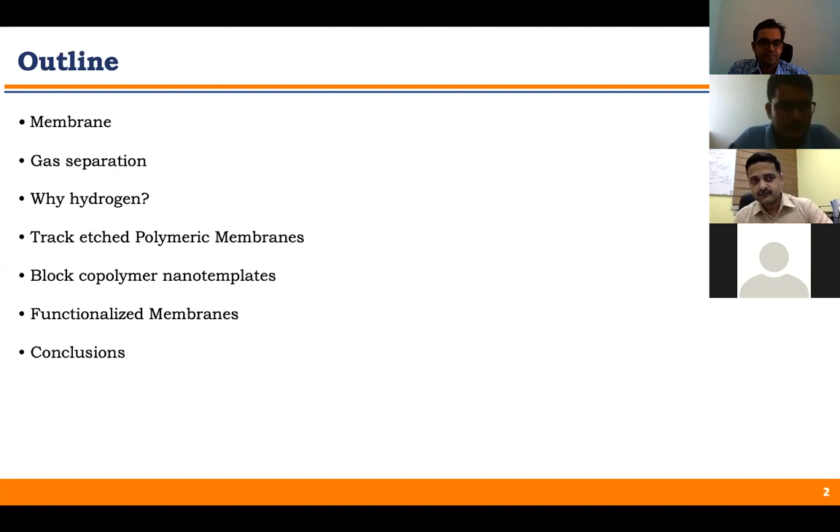Okay. So a membrane, we can say, is a selective barrier between two phases that may allow the movement of different species under the presence of a driving force over the membrane. It may be liquid, it may be gas, or something else. And how can we force one part from one side to another? These driving forces may be a concentration gradient, pressure gradient, temperature, or electrical potential gradient over the membrane.

So basically that will control the movement of one species into another. That may speed up the process or slow the process. These are typically the driving forces used in membrane separation. Biological membranes, or cell membranes, also regulate what enters and leaves the cell, and they provide protection and support; they are generally known as the plasma membrane.

And just remember, these cell membranes are very selective. They can allow only one type and stop the others. So can we mimic the same properties in a synthetic membrane, so that we can prepare a selective membrane for our application, like water purification or gas purification? This is the one major motive for those working in membrane science: to prepare highly permeable and highly selective membranes.

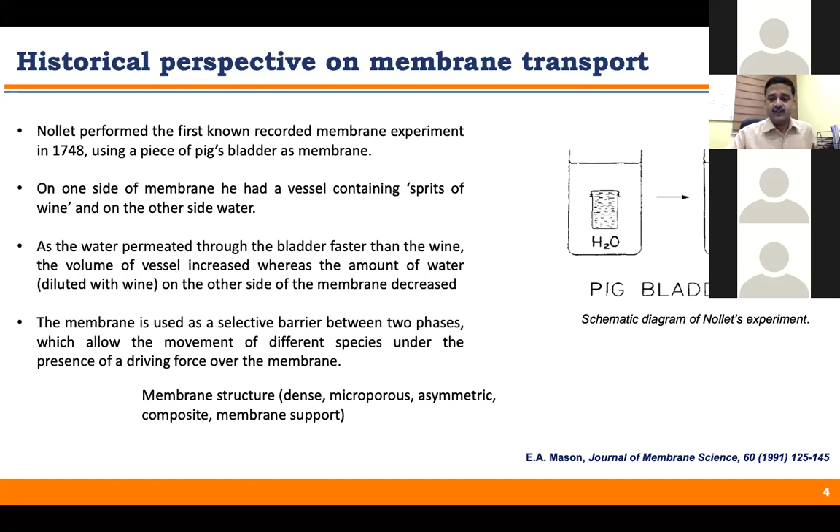So these are the types of membrane. Based on the structure, we can call them dense, microporous, asymmetric, composite, or membrane support. And membranes are basically of two types based on their structure: isotropic membrane and anisotropic membrane.

Isotropic membranes are categorized into three further categories: microporous, with pores having 0.01 to 10 micrometer diameter; dense non-porous, meaning there is no porosity or holes, where the driving force is basically diffusion or solubility; and electrically charged microporous membrane. I will show you some examples of this dense non-porous membrane too. So these are the examples of isotropic membranes.

Another category is anisotropic, that is asymmetric. Here we have a thin active layer supported on a thicker porous layer. That may be composite, and another part may be ceramic, metal, or liquid membranes. Nowadays people are using this anisotropic membrane for various applications like gas separation and other ion separation. I will show you a few examples of anisotropic membrane too.

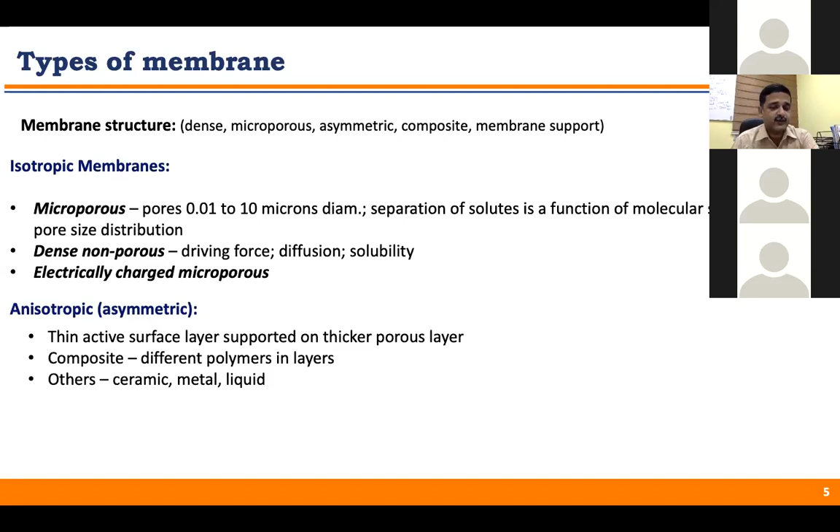So what are the membrane materials and the fabrication methods? You can make this membrane from polymers, metal membranes, ceramic membranes, or liquid membranes. But my lecture today will be more focused on polymers. I've already discussed the two types of membrane, isotropic and anisotropic.

This isotropic membrane can be made by solution casting and melt extrusion, track-etched membrane, expanded film membrane; and anisotropic membrane made by phase separation, interfacial polymerization, solution coated composite membranes, and plasma deposition. I will discuss each of these methods in detail in my next slides.

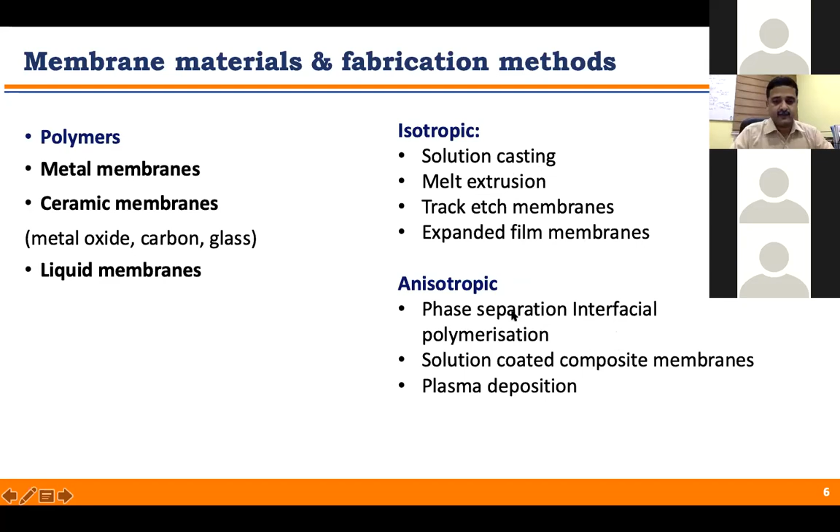And these are the various membrane processes: microfiltration, ultrafiltration, reverse osmosis (RO membrane) that you're using for water purification, gas separation, permeation, pervaporation, dialysis, electrodialysis, and liquid membrane.

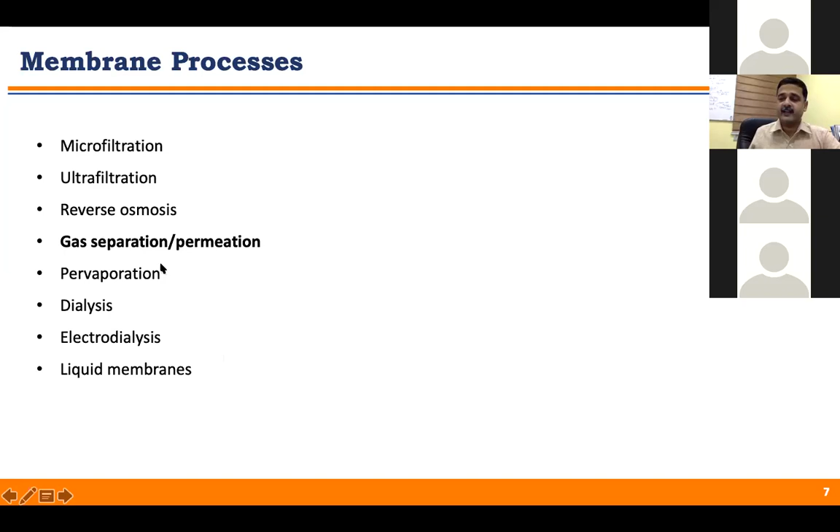I will show you some examples related to gas separation and permeation, based on work that I have carried out over the past couple of years.

How can we differentiate the different kinds of membrane technology? We have microfiltration, ultrafiltration, nanofiltration, and RO. These are basically categorized on the basis of porosity or pore size. I will use two terms in my presentation: porosity or pore size, meaning the size of pores in the membrane, and pore density, meaning the number of pores in the polymeric membrane per unit area. If you see microfiltration, the pore size is too large.

That's why we need less operating pressure for microfiltration, around 30 psi. Using this microfiltration membrane, we can remove clay, bacteria, virus, and suspended solids.

But if something is smaller, we have to use the ultrafiltration membrane. Here the pore size is 0.01 to 0.001 micrometer. As we decrease the porosity, the operating pressure increases—here it's 20 to 100 psi. This kind of membrane can remove virus, proteins, starch, colloids, silica, and organic dye, because the size of these materials is either greater than or roughly equivalent to the porosity of the membrane.

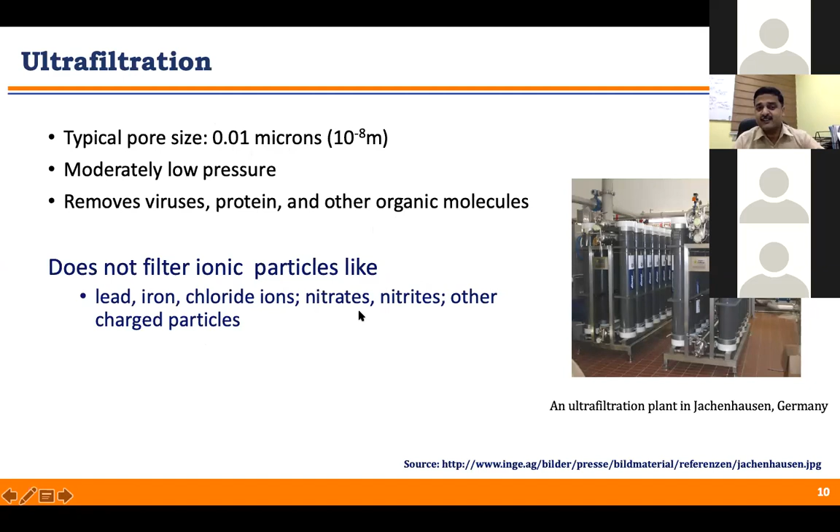Then there is another possibility, we can use nanofiltration. Here the membrane porosity is 0.001 micron, and it can be used at moderate pressure. It removes toxic, unwanted bivalent ions with 2 or more charges, like lead, iron, nickel, and mercury, but not monovalent ions. So we need this RO membrane.

As I told, this RO is operated at very high pressure, and it's the only economically feasible large-scale method to remove salt from water. So large plants are used for reverse osmosis or desalination water treatment near the ocean.

But this RO is not for everything, because it is the most costly filtration system. Since the pores are so small, big particles can clog them, and this is the problem called fouling, which makes the filtration membrane unusable.

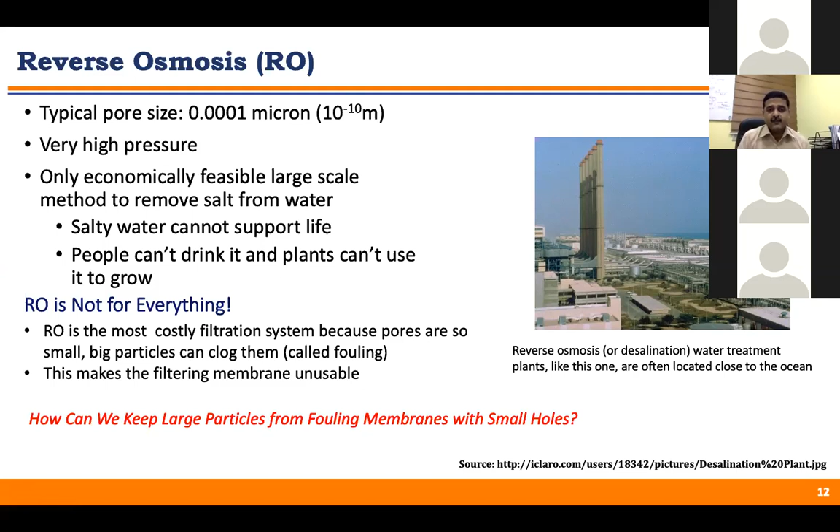So can we do something with a polymer or some other kind of membrane to reduce the process of fouling, so that the membrane cost can be reduced and its life increased?

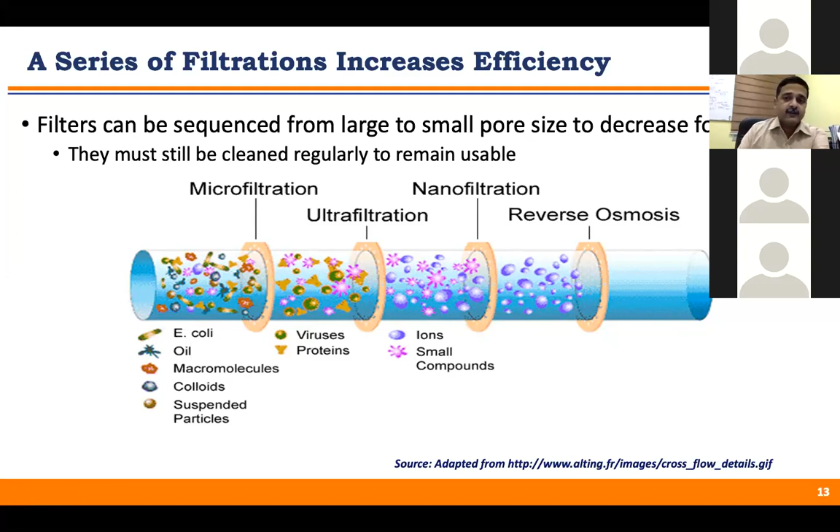Okay, so this is the first example. If we use a series of filtration, like microfilter, ultrafilter, nanofilter, then RO, that can be used to increase the life of the RO membrane, because we have step filtration at every stage. But again, the cost of the membrane and the process increases. So this is not a good solution for membrane technology.

So there are a couple of papers reported for nanofiltration. What people have done is prepare nanoparticles with special properties. Special size means these nanoparticles can attract one kind of impurity, and that impurity gets attached within the pore or on the nanoparticles, so it will not pass through during filtration.

So people are using metal composite or nanoparticle based membranes for various applications. This nanomembrane can be designed in layers with particular chemistry for a specific purpose. They insert particles that are toxic to bacteria.

They embed tubes that pull water through and keep everything else out, signaling the membrane to self-clean. The 1 to 2 nanometer size pores create an electric field over the opening. This electric field is negative and repels negatively charged particles dissolved in the water.

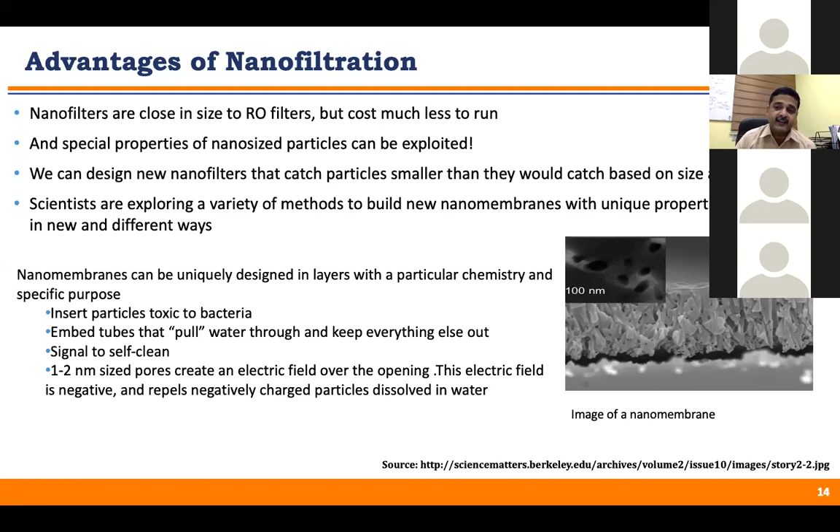Now the question comes: everybody knows this is a polymer, a long chain molecule. So in a normal synthetic membrane or polymer, how is it possible to have an electric field in the pores, and how can we control it? We will discuss this during the pore size and porosity discussion.

So this is just an overview of membrane technology, the types of membranes and the problems. This is the application part I'm working on, using gas separation with these kinds of membranes, particularly hydrogen separation. Just for your reference, the hydrogen gas molecule is the smallest.

The other gases, like nitrogen, carbon dioxide, and oxygen, are not very big compared to hydrogen. So the gas separation part is relatively different from what we think about in liquid membranes or in water. I will show you a couple of slides with these separation results.

So why hydrogen separation? Because it is used in plants and petrochemical applications. We are separating nitrogen from air, carbon dioxide and water removal from natural gases, organic vapor removal from air and nitrogen streams. And the most important application is the fuel cell.

At the moment, the most widely used membrane materials for gas separation are polymers. People prefer these polymers over other kinds of materials because they have low capital investment, low weight, high process flexibility, and high surface area.

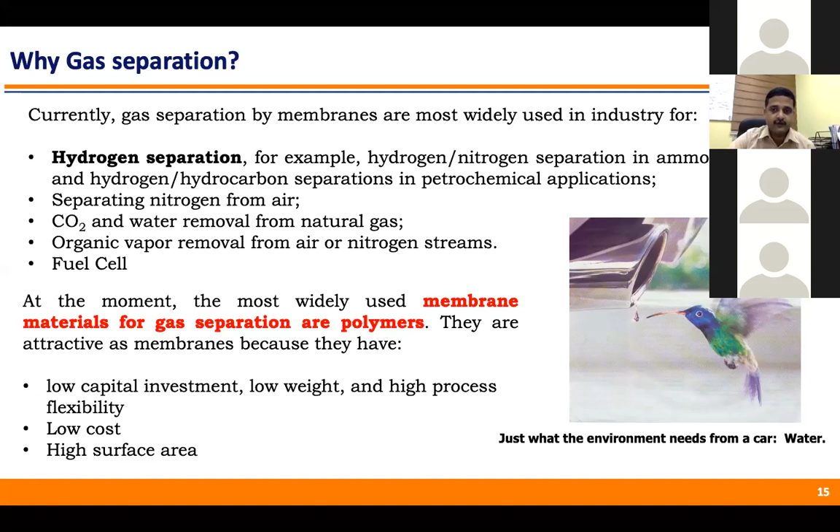So can we produce pure hydrogen for this application to make it feasible to use such technology for all? I'm interested in hydrogen because of the fuel cell part—this hydrogen powered car and the hydrogen powered train being used in Germany.

So the fuel cell conclusion means no pollution caused by burning fossil fuels. Water is the only byproduct, and that decreases dependence on foreign countries for energy. They have stationary fuel cells for decentralized power grids, more efficient than diesel and gas engines, quieter than diesel and gas engines, and with lower operating temperature, and so on.

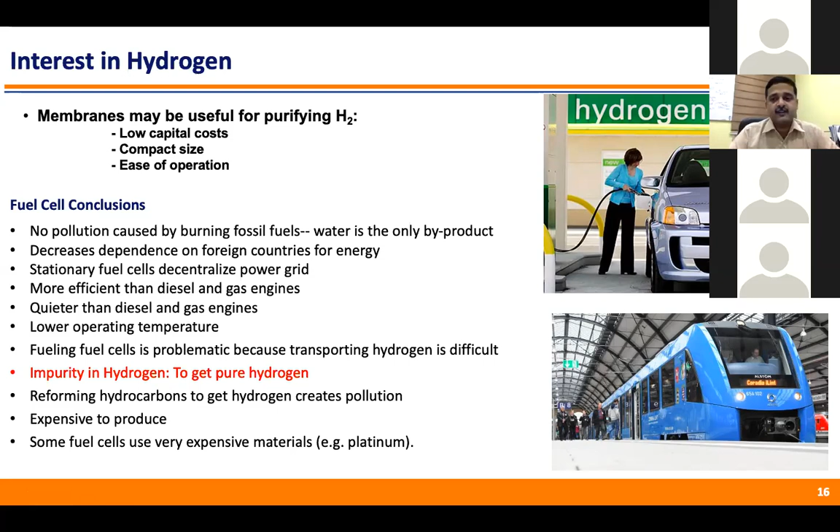But in fuel cell, the impurity in hydrogen is again a challenge. So can we purify the hydrogen before its application? Can we put some kind of membrane so that it allows only pure hydrogen and blocks other kinds of gases? This way, the fuel cell cost can be reduced. So this is the motive.

And this is the mechanism for transport through the membranes: bulk flow, diffusion, solution diffusion, and dense membrane.

An ideal membrane should have high flux, high permeability, high selectivity, tolerance to all feed components, mechanical stability, ability to package in high surface area modules, excellent manufacturing reproducibility, and low cost.

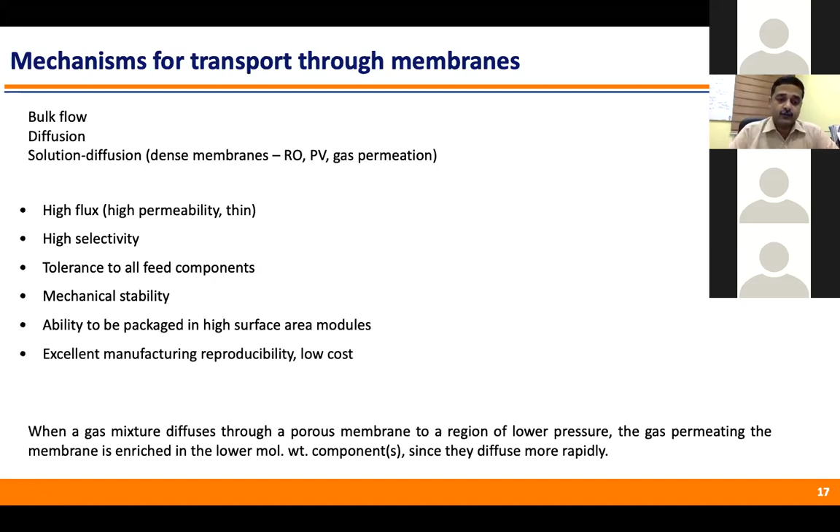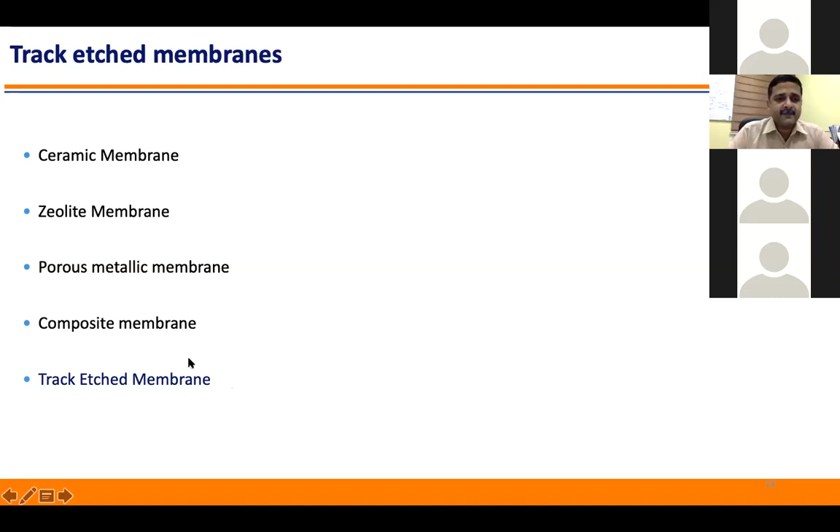These are the various types of membranes: ceramic membranes, zeolite membranes, porous metallic membranes, composite membranes, and track-etched membranes. So I am going to show you a couple of examples of this membrane.

So this is the mechanism that I have discussed, these three: bulk flow, diffusion, and solution diffusion. Here you can see two gas molecules, one small and the other larger.

If you talk about solution diffusion, due to the solubility difference, only one kind of gas molecule gets separated from this membrane. When we talk about molecular sieving, that is based on size exclusion. Please remember, I'm talking about solution diffusion - this model is true for the dense membrane, where the pores are very small in comparison to the gas molecule.

These two models are true for this porous membrane. When we talk about porosity, it means the pore structure is too small so that only one gas can pass through and others are blocked. This is based on size exclusion. Another is based on the mean free path, meaning the pore size is too large, so every gas can pass through comfortably. This is the upper side, the gas feed side, and this is the permeate side.

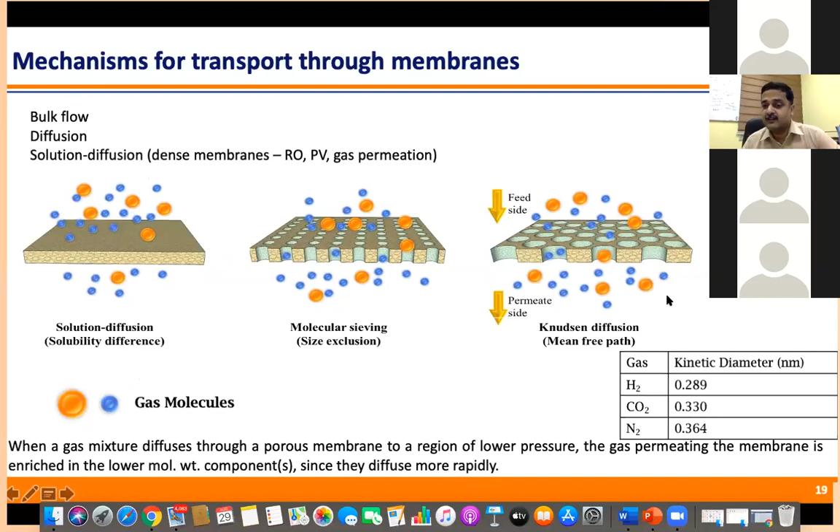So we can make some membranes - I think I discussed the slide on the ideal membrane. Here you see the complete picture of this membrane technology.

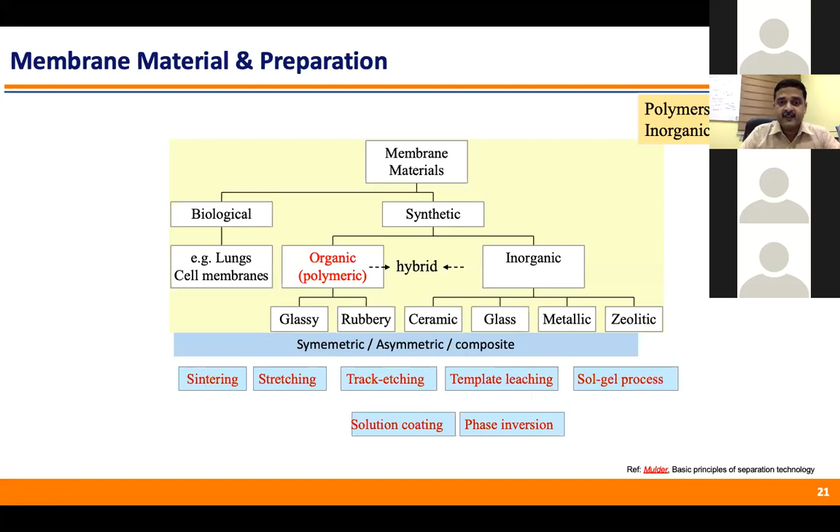Symmetric, asymmetric, composite - already I have discussed these. These are the processes by which membranes are made: sintering, stretching, track etching, template leaching, sol-gel process, solution coating, and phase inversion. In the next 5 or 10 minutes, I will show you some of these process details. Solution coating and phase inversion are the popular techniques used for membrane separation.

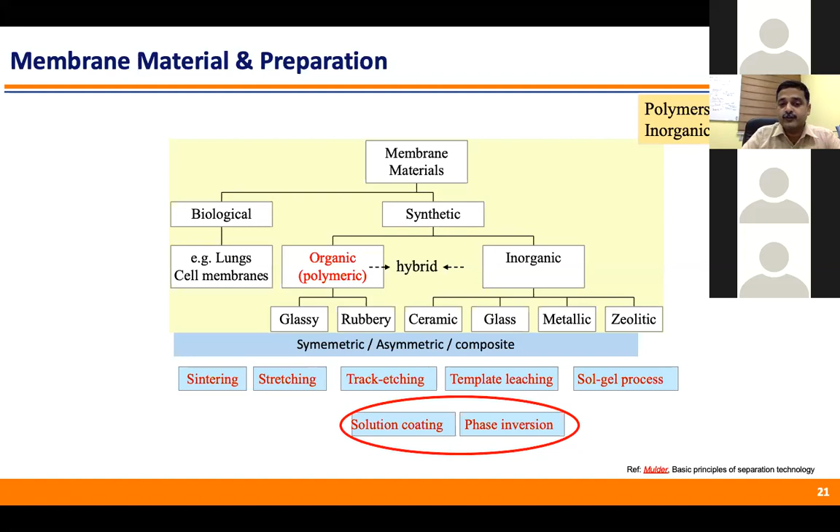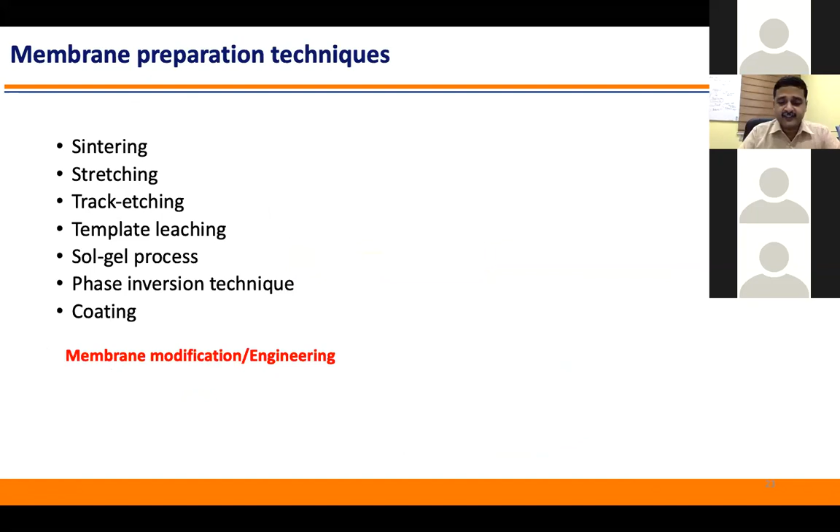Apart from these preparation techniques, we can also do some membrane modification or engineering on these earlier membranes to make them more versatile or more useful for application-based purposes.

What is the sintering process? Sintering process involves compressing a powder consisting of particles of a given size and sintering at high temperature. This produces a polymeric and inorganic membrane with outstanding chemical, thermal, and mechanical stability. Sintering temperature depends on the material - polymers, metals, ceramic, carbon, and glasses. Pore size and distribution depends on the particle size and distribution, generally 0.1 to 10 micrometers. This is the structure, and after heat treatment, you can see the interconnected porosity that has been generated.

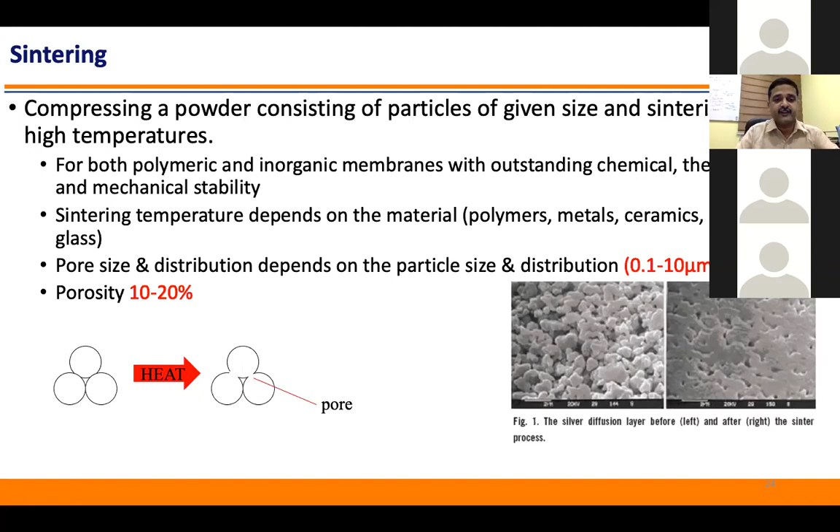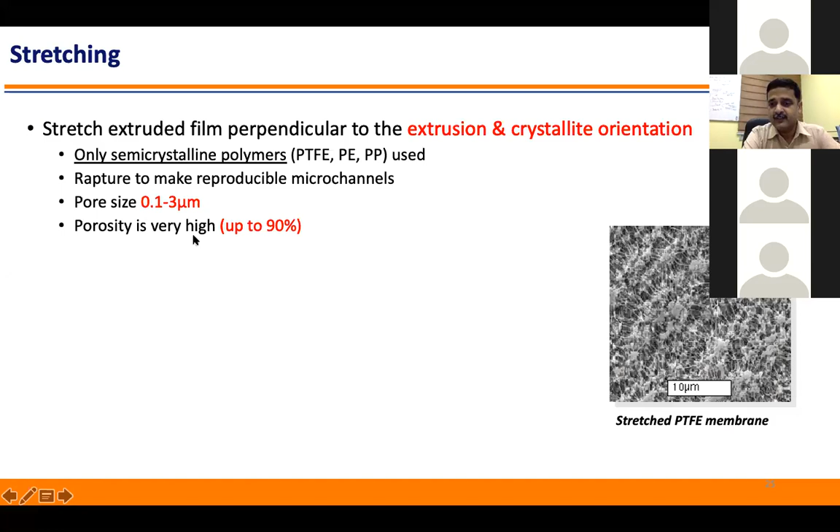Another example is stretching - this is an extruded film perpendicular to the extrusion and crystallite orientation. But this process is only for semi-crystalline polymers like PTFE, PE, and PP. Rupture creates reproducible microchannels, and here the pore size is 0.1 to 3 micrometers, and the porosity is very high. Please remember, porosity means the number of pores per unit area. And this is the phase inversion technique.

Generally, we use phase inversion for making composite films or block copolymer nanotemplates. So what is happening here? A polymer is transformed in a controlled manner from a liquid to a solid state.

Phase inversion covers different techniques. For example, we start with a concentrated solution of a polymer in a solvent, and through addition of a non-solvent, sometimes from the vapor phase, we can prepare asymmetric membranes.

Basically, we get a dense skin layer integrally bonded in series with a thick porous substructure, made of the same material in each layer, and this solidification is initiated by a transition from one liquid state into two liquid phases, or liquid-liquid demixing, and so on.

So in a broad sense, we generally get this polymer in solid form or in grains, which means we have to dissolve these polymers in a solvent.

And again, you can pour this structure, or you can use this liquid state to get your required thickness or required shape.

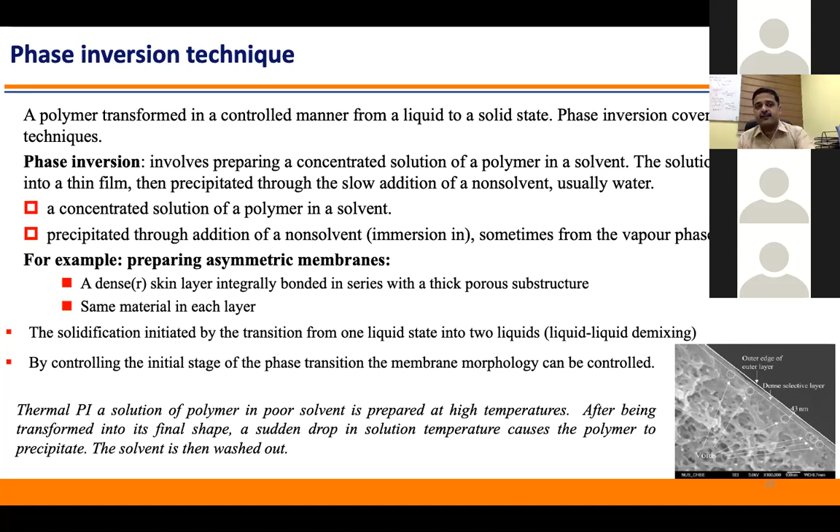So when you are transforming this liquid to a solid state, this process is generally known as phase inversion.

These are the various steps in phase inversion techniques. First, precipitation by solvent evaporation, also called simple evaporation or coating. Another is precipitation from the vapor phase.

This vapor phase may be a non-solvent and a saturated solvent, used to prepare porous membranes without a top layer. Another part is precipitation by controlled evaporation.

In this case, the polymer is dissolved in a mixture of solvent and non-solvent, to form the skin layer. This is thermal precipitation, meaning the polymer solution is cooled to enable phase separation, and then we can prepare the membrane with the skin layer.

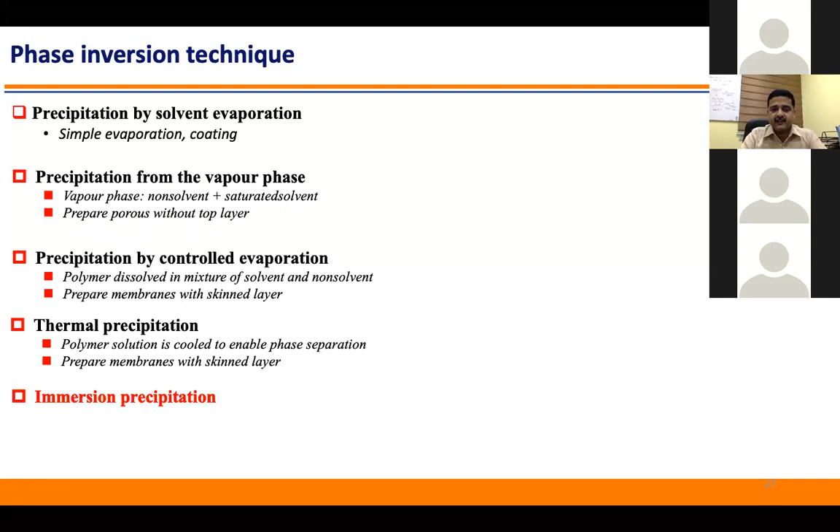Another method is immersion precipitation. Here you see a support on which you have coated your polymer solution. There are two possibilities: one is using a non-solvent, another is using a solvent.

So in this polymer solution, precipitation occurs because of the exchange of solvent and non-solvent, and this membrane structure results from a combination of mass transfer and phase inversion.

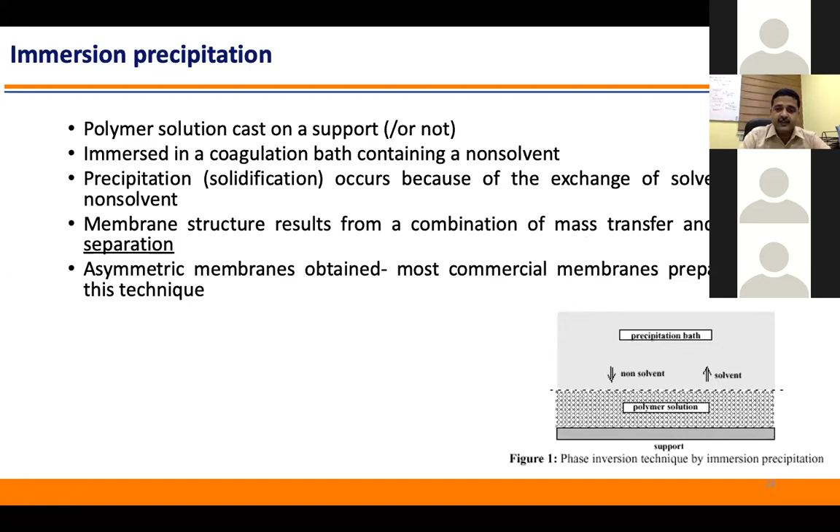With this process, we can make asymmetric membranes, and this is the most common commercial technique for preparing them — immersion precipitation is an active example of the phase inversion technique.

Now I'll cover another very simple method to make a thin film, or dense membrane, in your laboratory easily — this is the solution cast method.

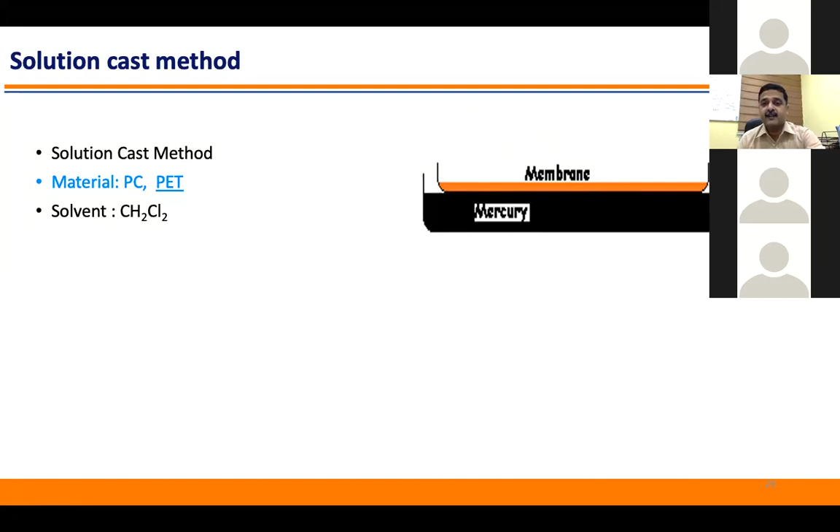It does not have any porosity, and in such a membrane, porosity can be introduced using other methods. The popular example is track-etched membranes.

This means we are creating tracks, or a path, in the membrane for the formation of pores. And why is this track-etched membrane so popular?

Because here you can control the pore shape — you can make them cylindrical, conical, or double conical.

You can also control the pore size, from a few nanometers to micrometers, and you can control the pore density, meaning the number of pores in a given area.

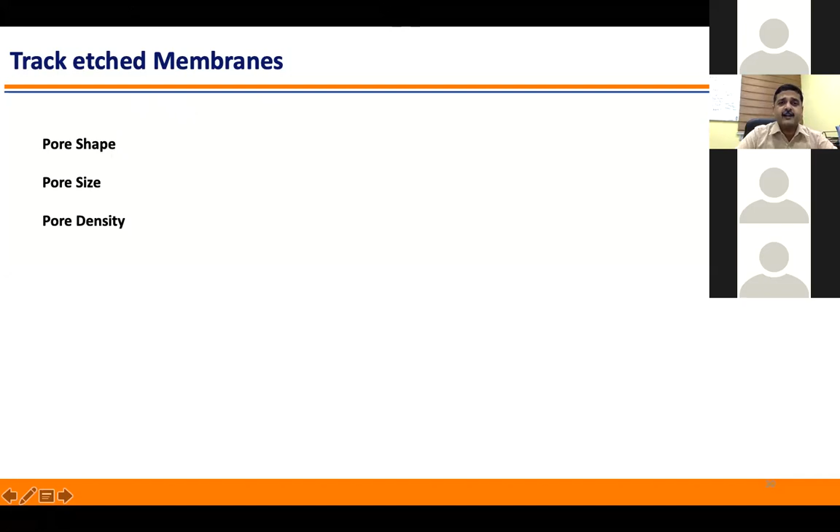So how can we do this, and what is the process to create these channels? We do this polymer modification using Swift Heavy Ions, SHI.

These facilities are available at the Nuclear Science Center, earlier known, and now called the Inter-University Accelerator Center, IUAC, New Delhi, and also at TIFR Mumbai.

They have this accelerator, and you can go there and use your polymer film for ion bombardment to create porosity.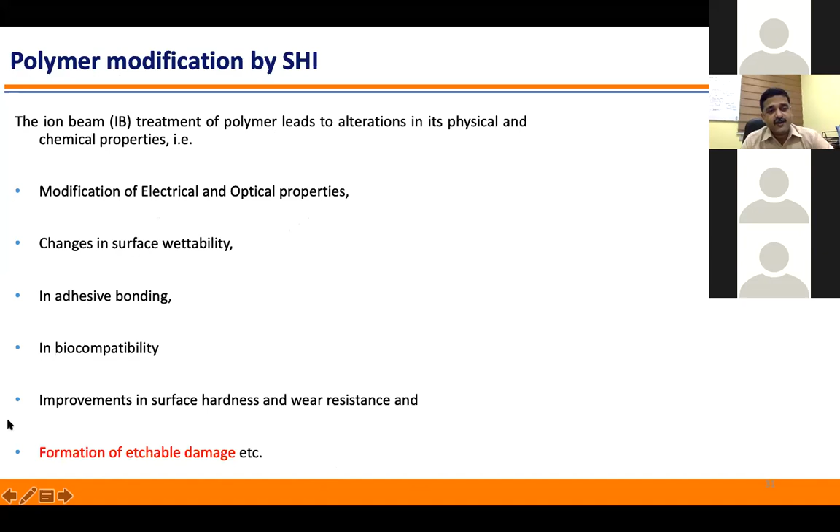So what ion beams can do is change a polymer's physical and chemical properties. They can modify electrical and optical properties, surface wettability, and so on. But the main important area is the formation of etchable damage. What is happening there? Okay.

You know, a polymer is a long chain molecule. So just imagine what happens if a high speed particle crosses this polymer film. These polymer chains basically break. And what is the process here? You can see this is a polymer chain, and this is the energetic particle crossing it. So chain scissioning is there, chains are breaking, and again cross-linking with the neighbor chains.

Ultimately, what is happening? The free volume inside the polymer is changing. And this is a simple picture that you can understand. This is the path of the ion, what we call the halo or track, created by this ion beam, and this is the damage being created by this ion beam. The ion beam is not going straight, it is creating a helical path, and these chains are bound loosely with the material, and they can be removed chemically. This process is known as chemical etching.

So the change in the polymer depends, of course, on the energy of the ions. What is the energy of the ion? Whether it is able to cross this membrane or not. What is the mass of the ion? What is the charge state? And what is the dose? Dose means number of ions per centimeter square. Okay.

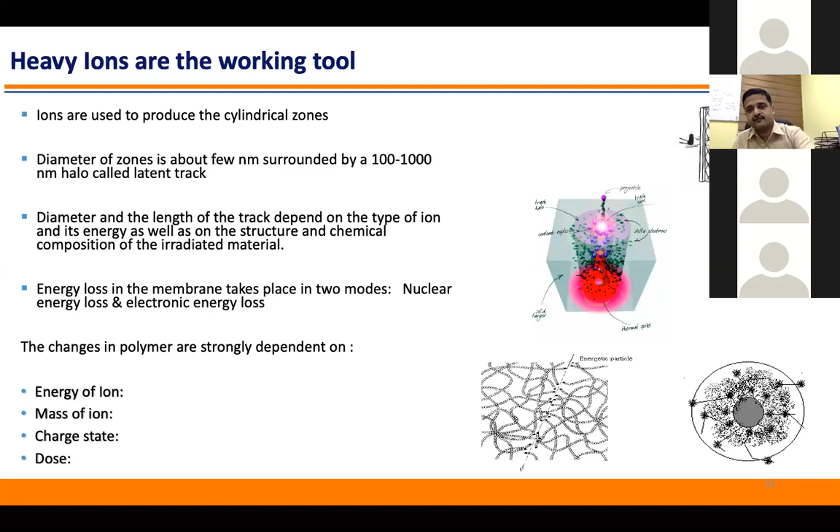So this is a typical attachment that is available in IUAC New Delhi. What is happening here? We are getting an ion beam, and this is a gold foil. Here the ion beam is scattered in this chamber. You can see the 3 ports on this side, 3 ports on this side, and this is the surface barrier detector. And here we have our samples, membranes, mounted at different angles: 6 degrees, 12 degrees, 18 degrees, again 6, 12, 18, and 24 degrees.

So by Rutherford scattering, we can control the fluence. We know exactly the number of ions coming at 24 degrees, so accordingly we can fix the dose at 18, 12, and 6. Generally we have 10 to the power 6 ions per centimeter square, 10 to the power 7, 10 to the power 8. So in a single beam line, we get 3 doses at 6, 12, and 18 degrees in a particular time, depending on the current.

But the only problem is this is a huge chamber. So maintaining the vacuum and other processes takes around 2 to 3 hours, and the irradiation process takes only a few minutes, maximum 3 to 4 minutes. Again, we take the samples out and mount another set of samples. So my sense is we are able to get only a few samples in 24 hours by using such an attachment.

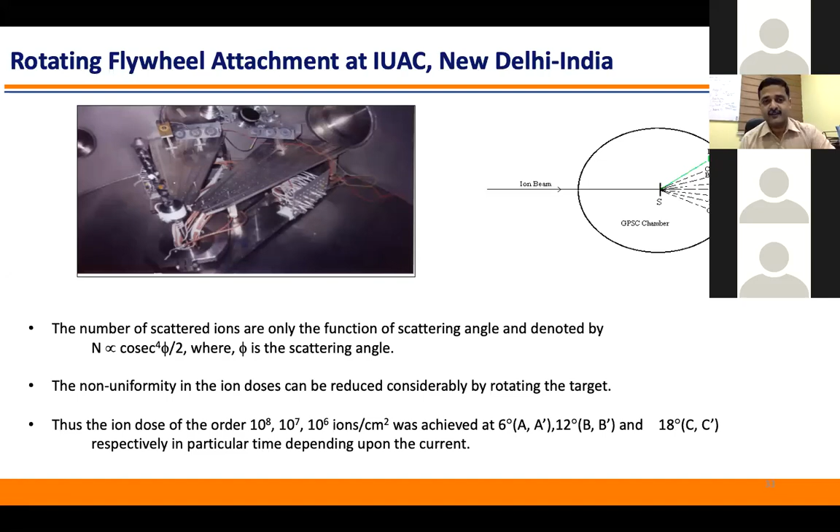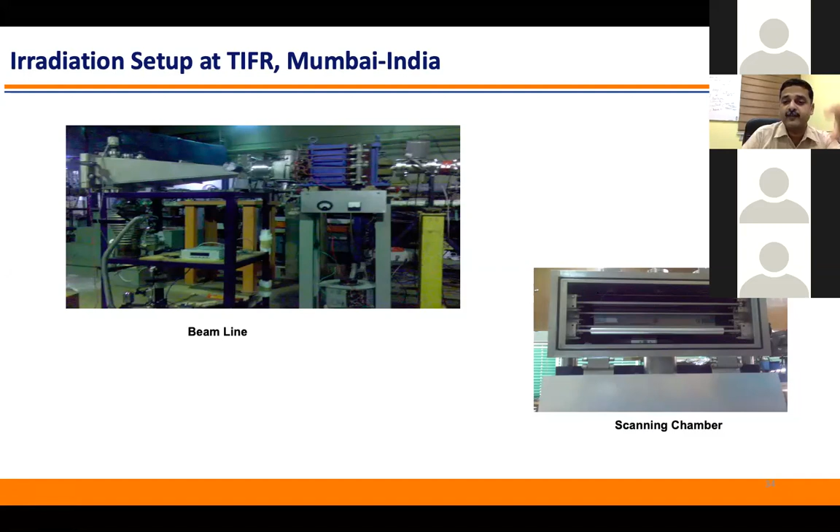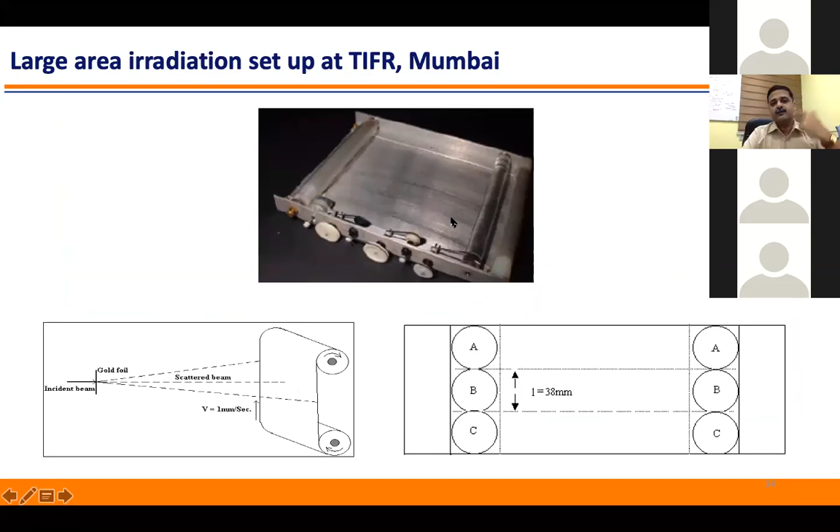Then there is another irradiation setup available in TIFR Mumbai. Here we have another facility. Not scattering; here the beam is scanning. This is the polymer roll mounted here. The beam scans over this film, and you get a single pore density or single dose membrane by using such a facility. Okay, this is how the film is rolled using this facility at TIFR Mumbai.

But what is happening finally? As I told in my previous slide, by ion beam bombardment you are creating tracks. This is the ion beam path, and there is damage around this track, which you can remove chemically, so you get the porous membrane. So latent tracks form as a result of ion irradiation. When you put it in a chemical etching bath of a strong base, NaOH, this path is removed chemically, so you get this porous structure.

But if you are etching from one side, you will get a cone-like structure. When you are etching from both sides, initially it may be cylindrical or conical.

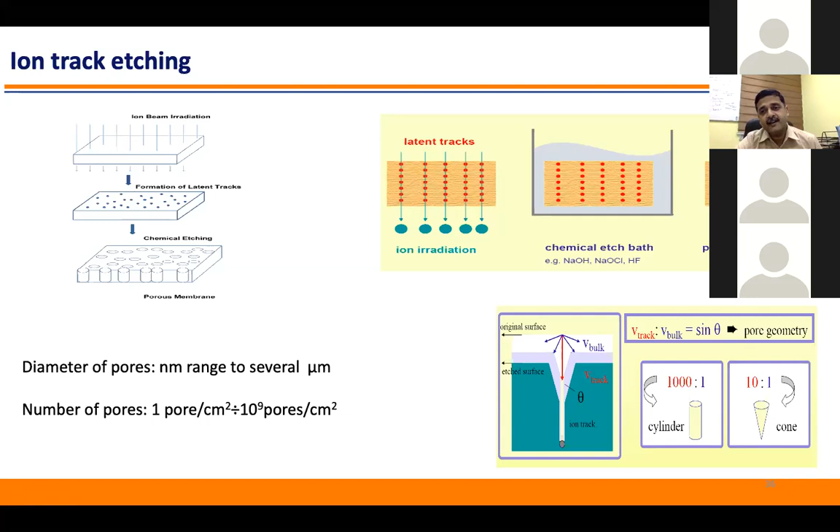Sorry, initially it may be conical, and later on it can be converted to cylindrical. How? So this is the track shape if you are using the increasing rate, constant rate, and decreasing rate. So suppose you are doing this etching from both sides; just imagine this is the condition from this side and the same condition from this side. So when these vertices are opening, it is a perfect combination of a double cone.

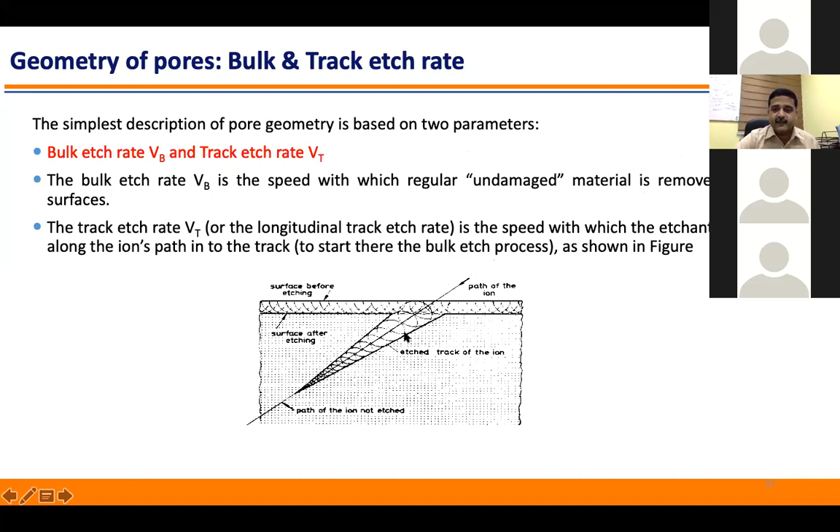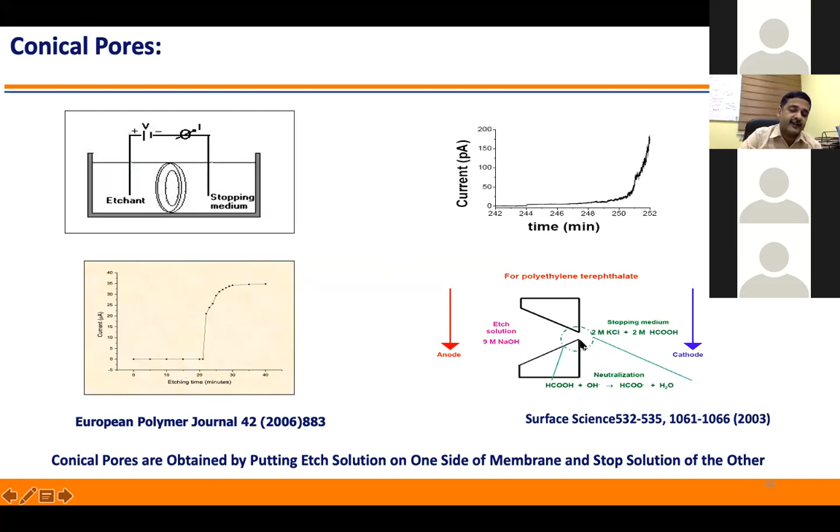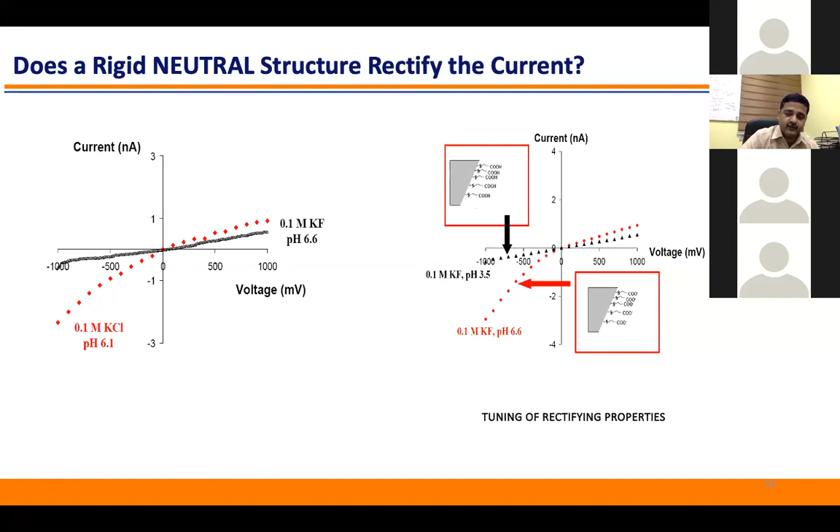But again, why are we seeing this diode-like behavior in a normal polymer film? The answer is, when we do chemical etching, the carboxylic group COOH is generated along the walls of these membranes, and this carboxylic group is responsible for the charge, or the rectification process, and this can be controlled either by the pH or by the concentration. So if we want to tune the rectifying process, like ion movement from this side to this side, this can be controlled using the anode and cathode, and you can control the flow of ions through this membrane from one side to another.

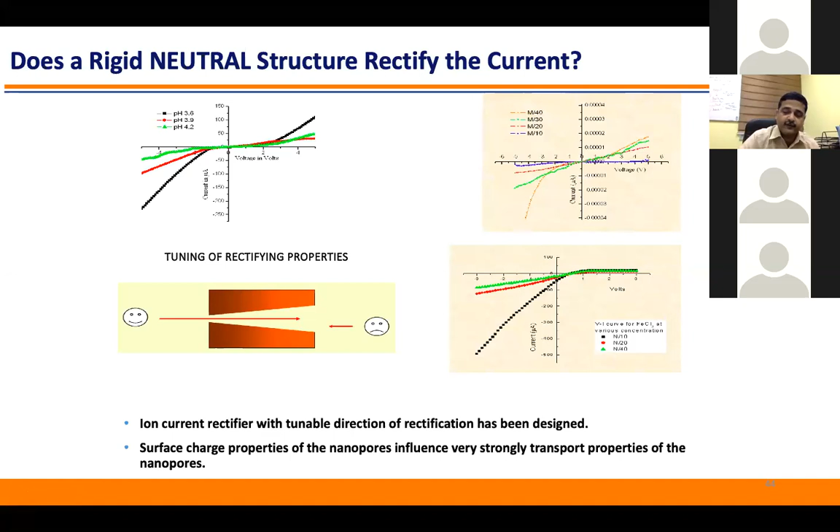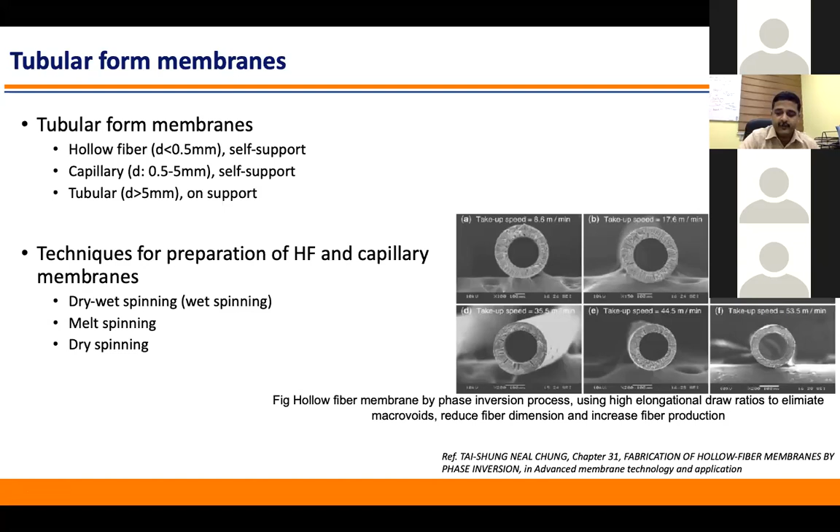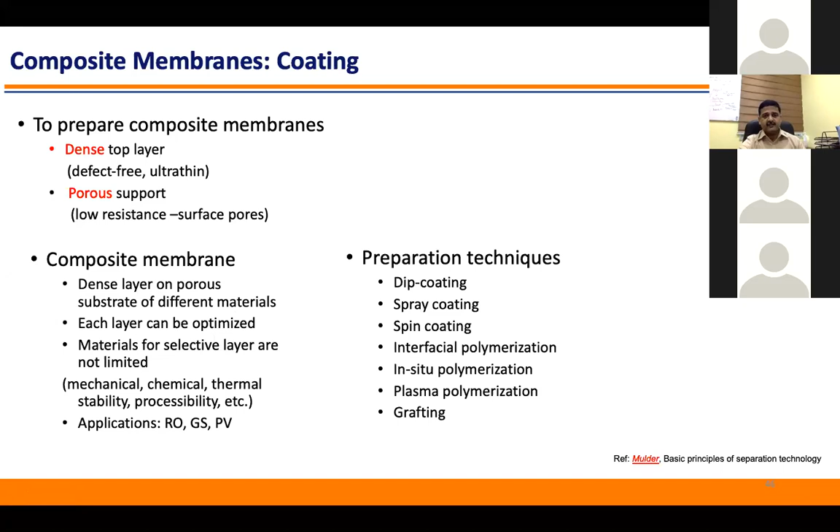A composite membrane means a dense layer on a porous substrate of different materials. Each layer can be optimized, and materials for selective layers are not limited. I'm showing a few examples of composite membranes in my next few slides. So this is the dip coating technique. This is a typical dip coater available in our labs. Here you can do some programming, fix your membrane, and at the bottom put the solution where you want to dip this membrane. It can be used for post treatment like cross-linking or heat treatment.

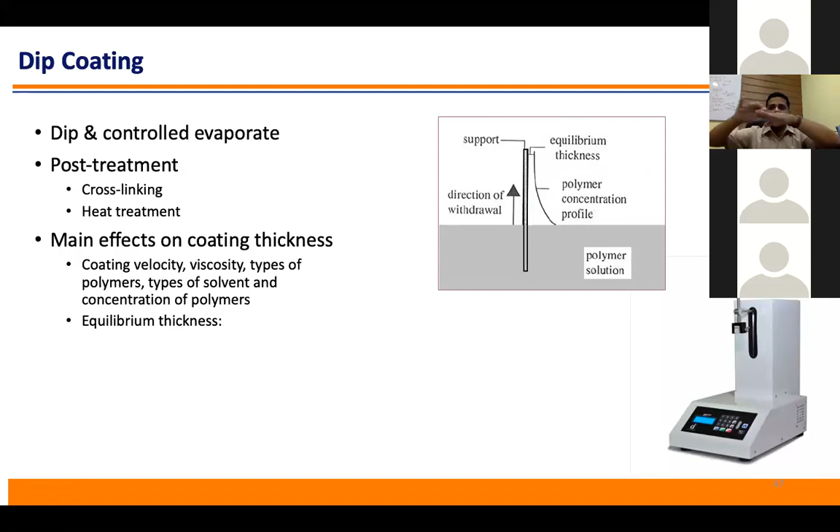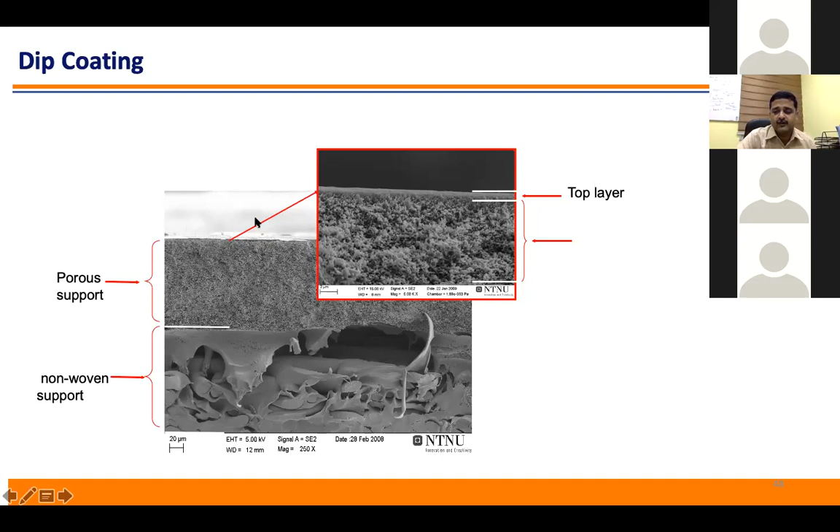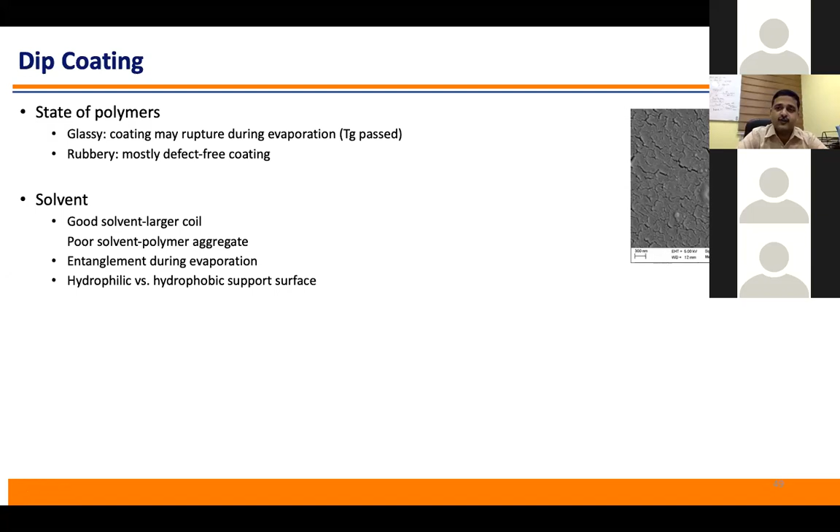In dip coating, consider the state of polymers, glassy or rubbery, and the solvent, and you have to optimize the conditions according to your application. You have to use a good solvent for a larger coil, a poor solvent for polymer aggregation, entanglement during the evaporation, and hydrophilic or hydrophobic support surfaces. You may have to change the nature of your membrane, hydrophilic or hydrophobic, by plasma treatment, or fill the pores when you coat your membranes.

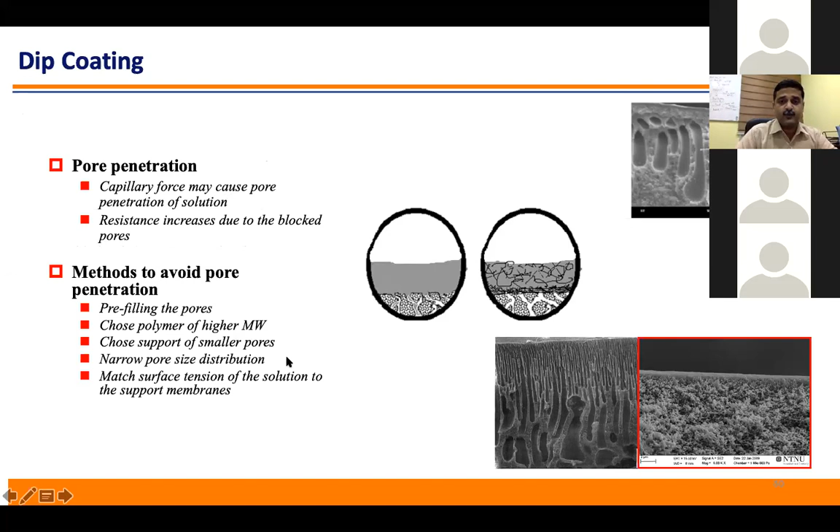Then there is pore penetration: capillary force may cause pore penetration of the solution, and resistance increases due to blocked pores, and so on. There are some methods to avoid pore penetration: pre-filling the pores, choosing a high molecular weight polymer, choosing a support with smaller pores, and a narrow pore size distribution.

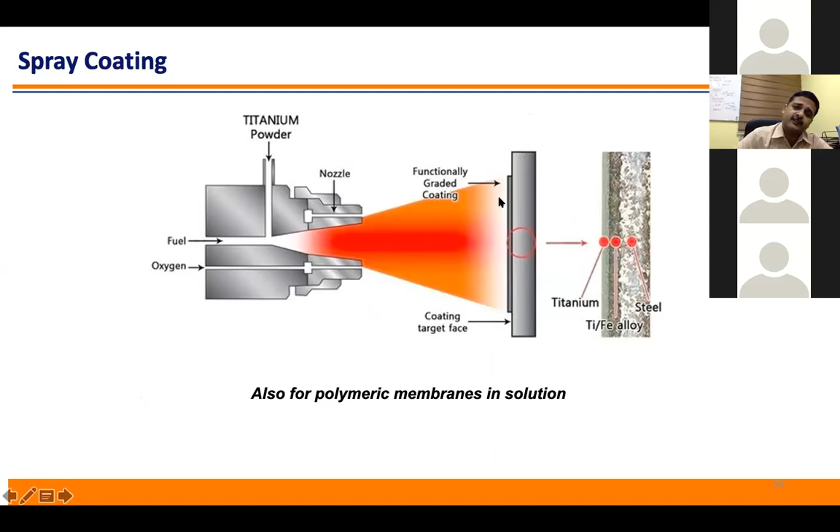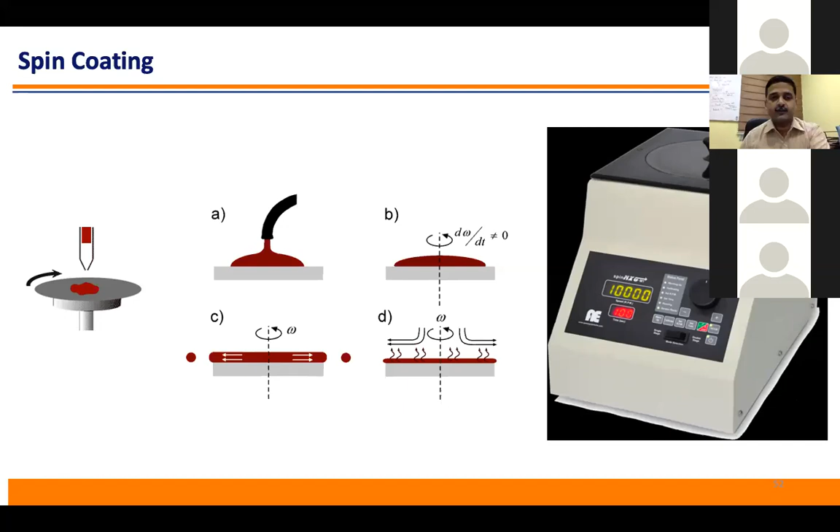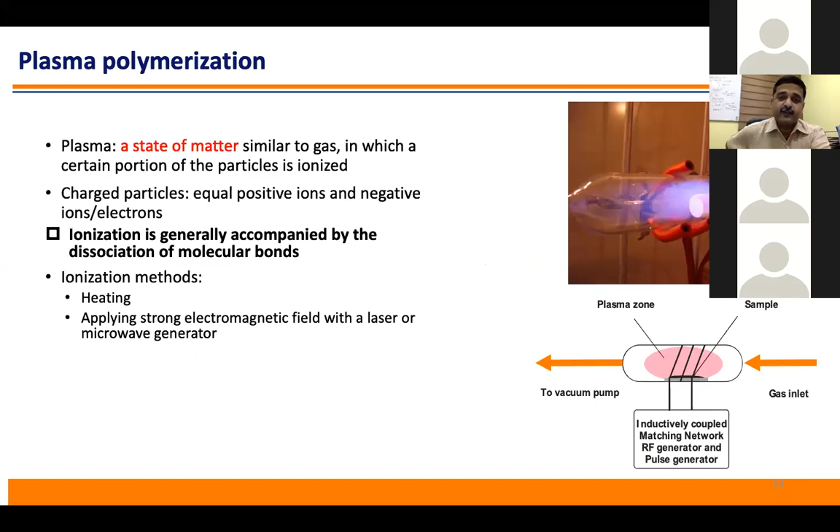This is plasma polymerization, which can be used for composite membranes, and plasma is also used for changing the nature of pores from hydrophilic to hydrophobic. In the last 5 or 10 minutes, I will show you another example of a composite membrane that we made in our lab. We used multi-wall carbon nanotubes and mixed them into our polymer solution. This is a polycarbonate polymer and MWCNT combination. These are random multi-wall carbon nanotubes, and once the solvent is evaporated, we can use this membrane for gas separation applications.

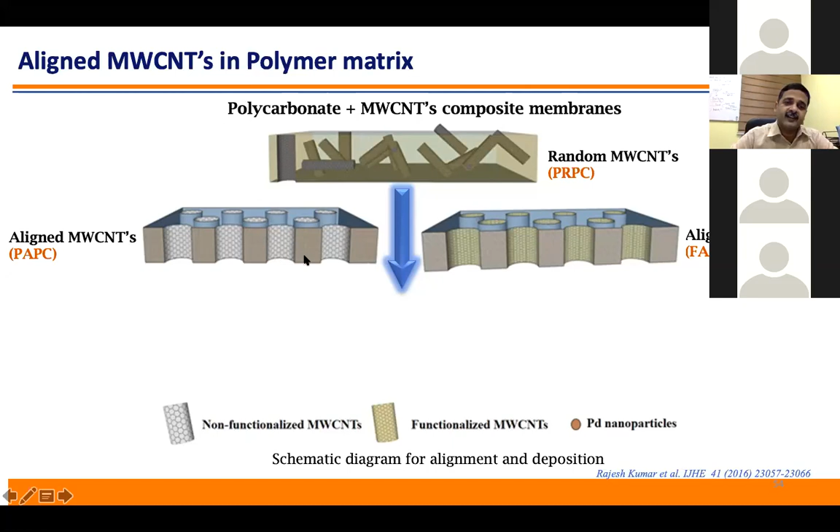But please remember, this is the random orientation. Then what we did, we applied some magnetic field and put our Petri dish in between this magnetic field. Once solvent is evaporated, then we removed it. Since there is this solid state, it cannot go left and right, and most of the CNTs are aligned perpendicular in the polymer matrix.

So these are the aligned multi-wall carbon nanotubes in a polymer. Then we did some palladium nanoparticle deposition on these CNTs. We used two kinds of carbon nanotubes: one normal, and another functionalized with palladium nanoparticles. So this CNT is without palladium, this CNT is with palladium.

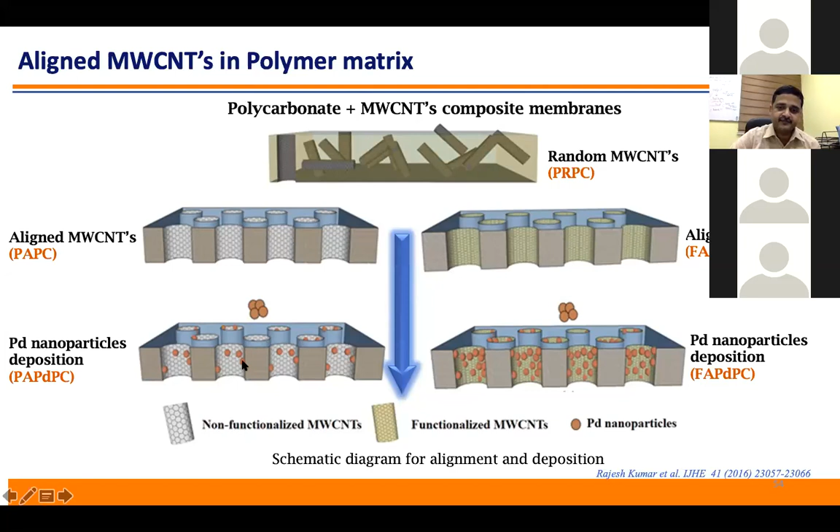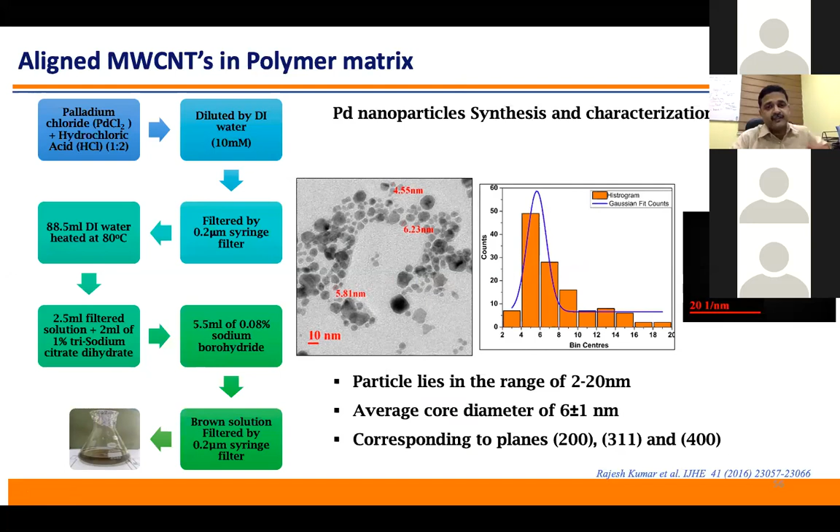And then we did some characterization using Raman, FTIR and other things. Finally, this is the palladium nanoparticle synthesis. As you can see, the particle size is 6 or 7 nanometers, and these 6 nanometer particles are within the nanotubes.

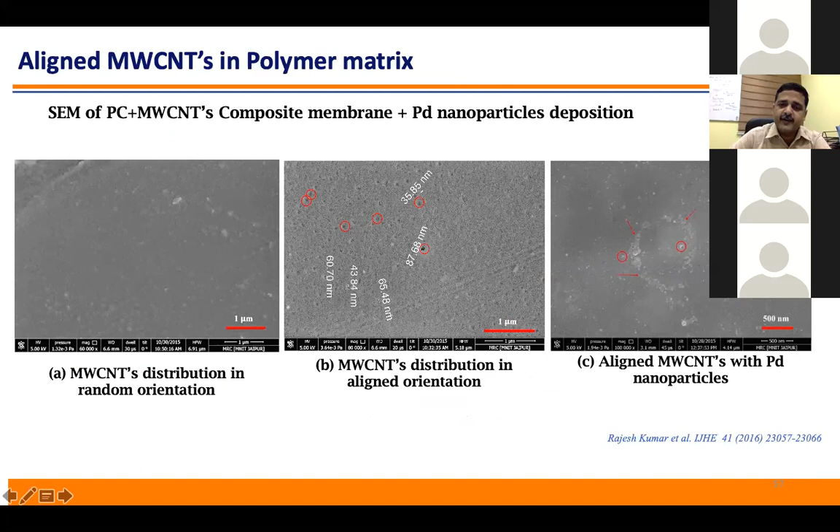And this is the random orientation. Here you can see some dots—basically this is the opening of nanotubes on the surface. And here we use palladium nanoparticles also, so this white part is basically the palladium over the surface.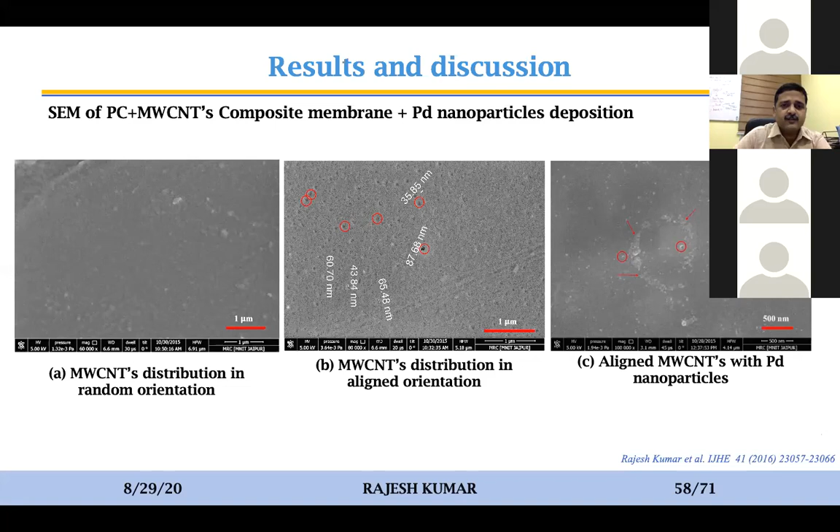So what is happening during this gas transport? Because this is a dense membrane, we follow the solution diffusion model, and this is the process.

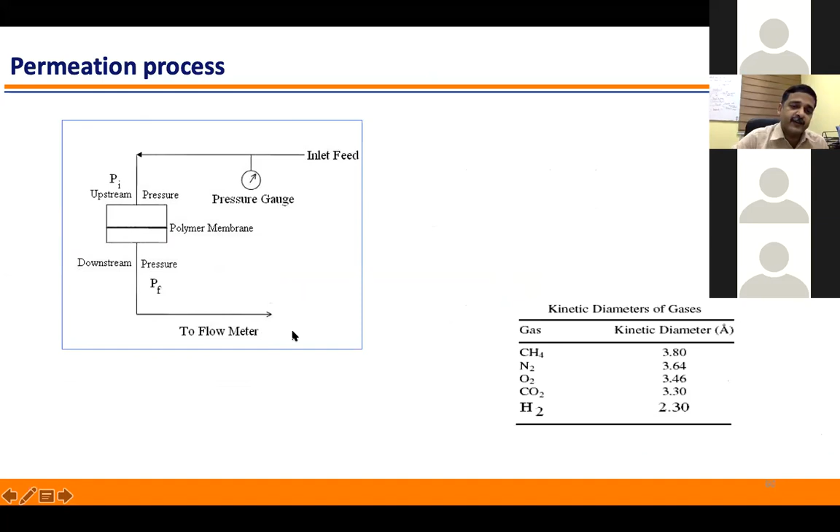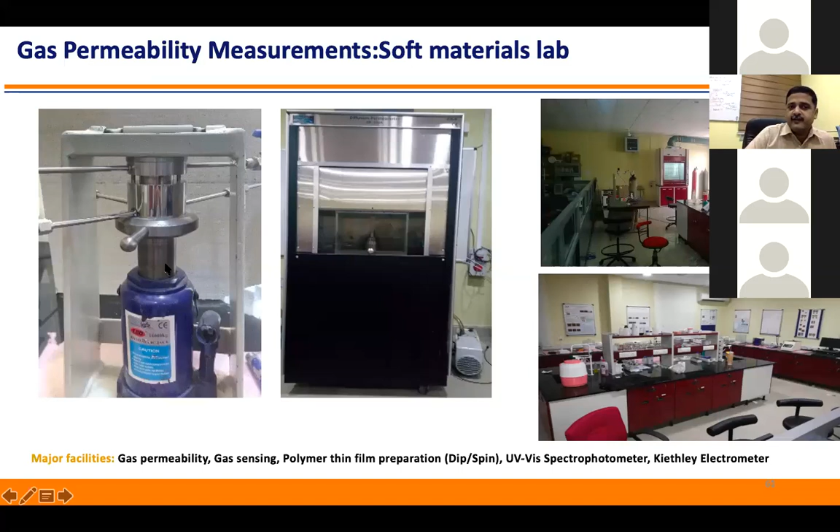Here we are using this polymer membrane, and here we are giving the pressure of gas, and this is the downstream pressure that goes to the flow meter, where we measure the flow of gases. These are two cells we have used for gas permeability measurements. This one we operate manually, and this one is program controlled for gas separation.

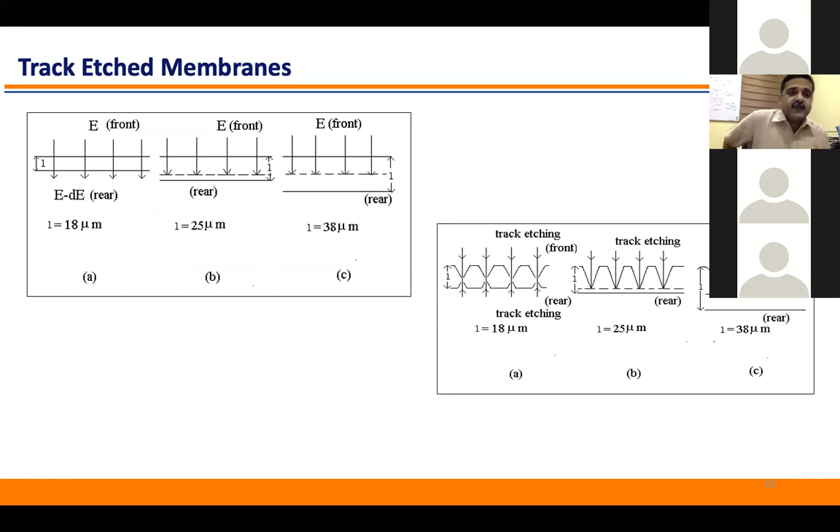Now let's see the results. This is the track-etched membrane. What is happening here is, as we increase the time, the pore is opening. The pore becomes too large, so every gas passes through comfortably, meaning permeability is increasing and gas permeation is fast. But at the same time, if you see the selectivity of these gases, it is being lost.

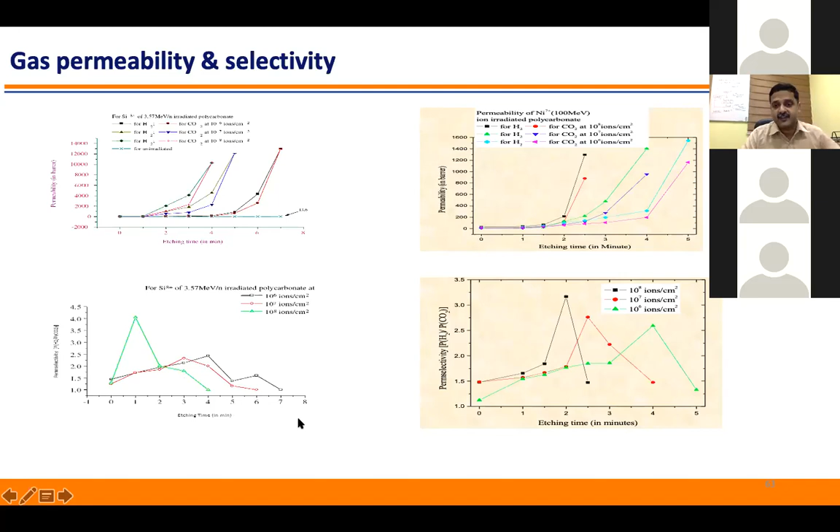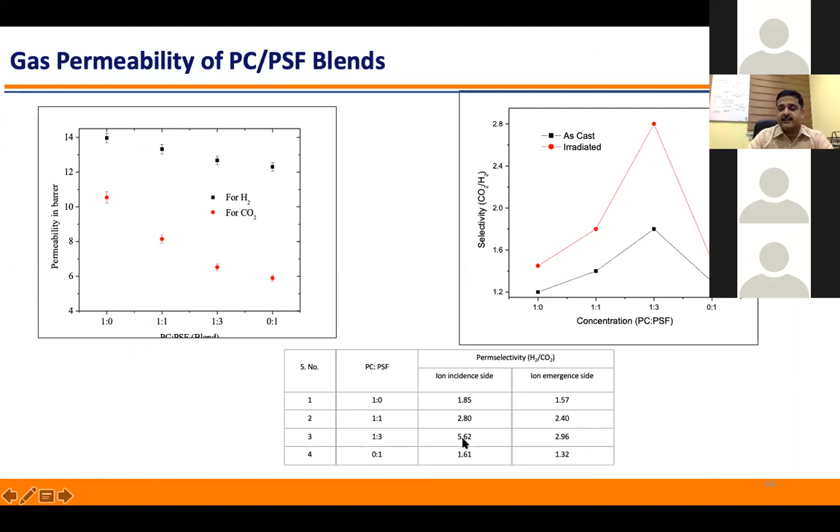It means around 1 minute etching time, this is very selective, but after 7 minutes there is no selectivity. And it is true for other membranes also—we have tried making blends of polycarbonate and polysulfone in different ratios. You see it is higher for the 1:3 ratio, ion incidence side from 5.6, ion emergence 2.9, because this is an asymmetric membrane.

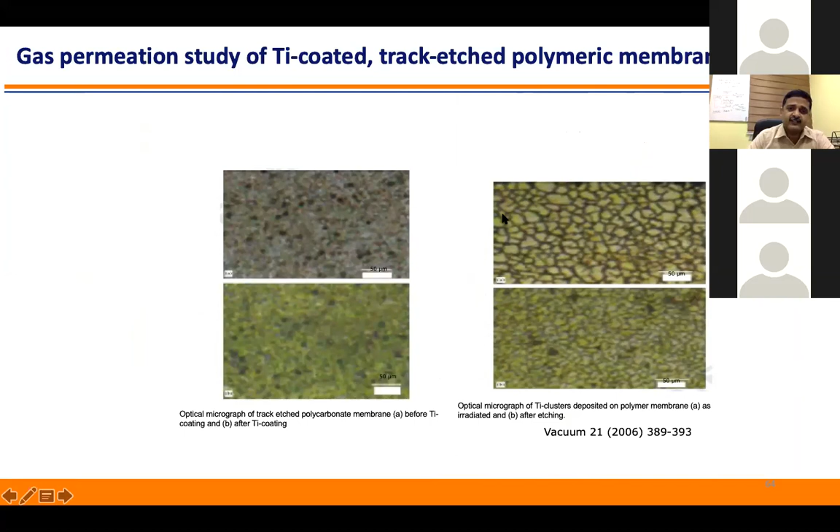We also tried coating them with metal—this is the titanium coated membrane. So most of the pores are covered when we did the coating, and the gas permeability becomes very poor. This is for the large area, using the TIFR setup I showed you.

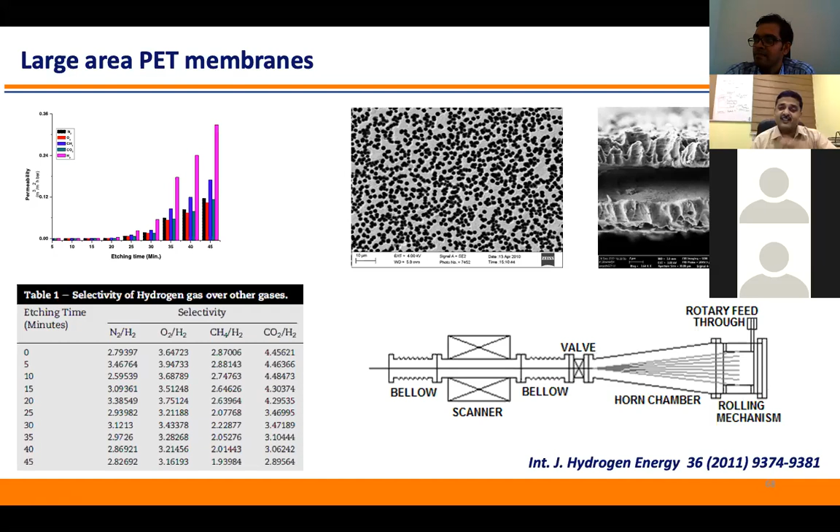So this is the gas permeability of CNT and other membranes, and here I have to stop, but this is about selectivity. So how can we make a membrane that is both highly permeable and highly selective?

There is a possibility if I use the concept of functionalization. Functionalization of membranes means creating functional groups on the pore walls, and giving some charge to nanoparticles, so that from a gas mixture, one kind of gas molecule is absorbed within these particles and another will go out. In the next part, I will show you this functionalization and block-polymer based membrane work.

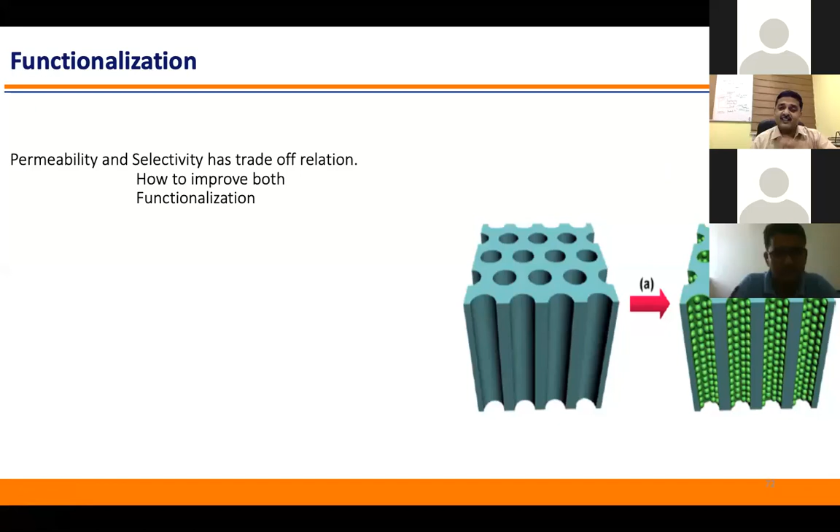I think I should stop here, and I'm happy to take questions or queries.

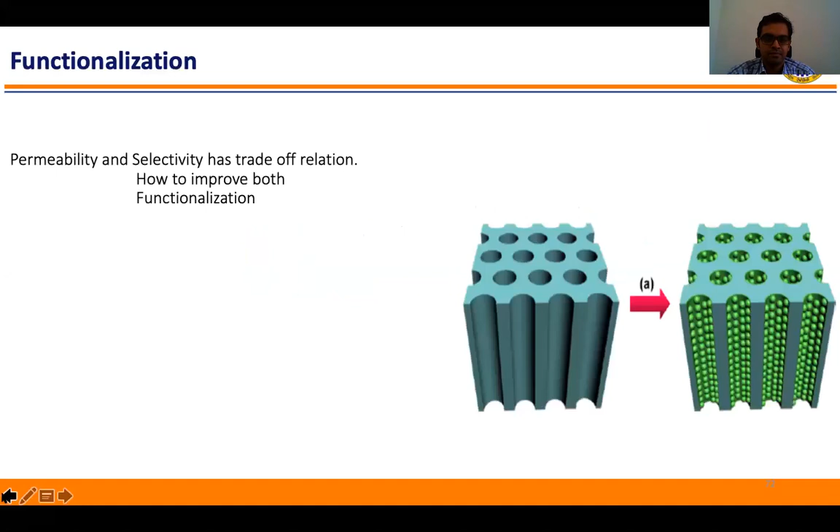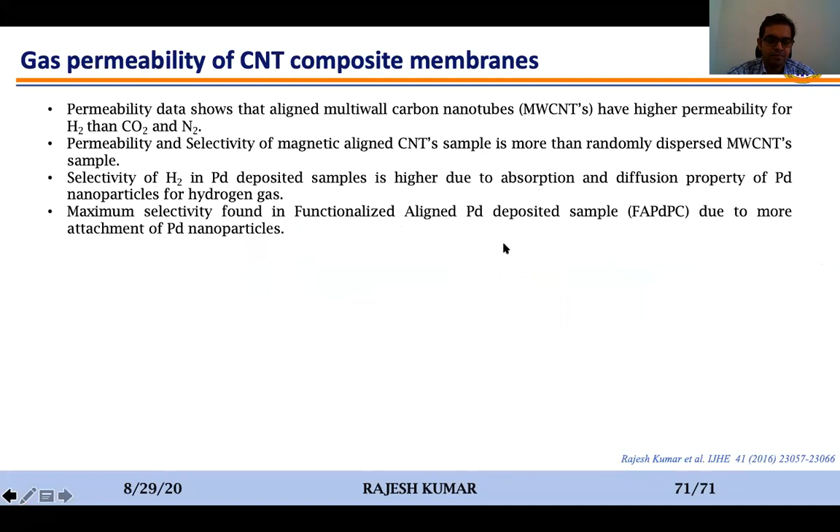So, sir, what is etch rate?

Etching rate means, in simple words, removing anything. I have told you that during irradiation, the ion path goes helically, so there are damaged areas along the path. When you are putting NaOH, the damaged or loosely bound material is being removed from the polymer. So for etching rate, if you are doing this chemically, the concentration or normality, like 1 NaOH, 2 NaOH, 6 NaOH, 10 NaOH, will speed up the etching rate. Or if you are using voltage, then 1 volt, 2 volt, 3 volt, 5 volt determines the rate at which you are etching your membrane. So this is the etching rate.